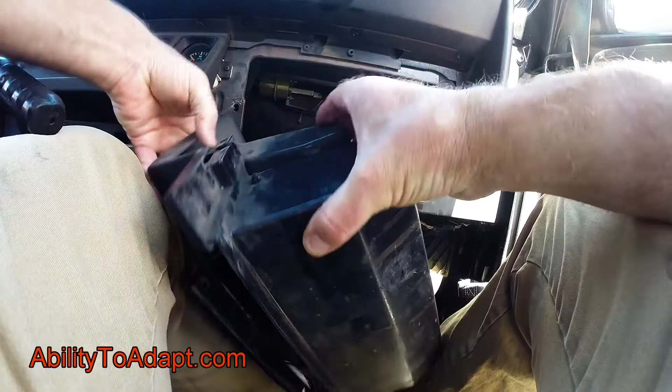So this just comes out. It was a pain in the butt to get out, because there's 3 screws that hold it up here under the dash, and then several screws underneath here. On the back side of this, there's actually 2 screws on either side—you can see here and here, and also on the other end, and they screw through these holes. The only way you can get to that is you have to reach up under here to get a driver to pull them out, and there's not much room. You can get maybe 2 or 3 clicks on your little ratchet.

You can't even get your hand up in there to turn a screwdriver or anything. So to do the other side, what I actually did is I pulled this faceplate off, took it off - there's 3 screws up here, 3 across the bottom - and I pulled this little thing off, then pulled my radio out, and was able to get my hand in from where the radio is around to the 2 screws that went through the backside there.

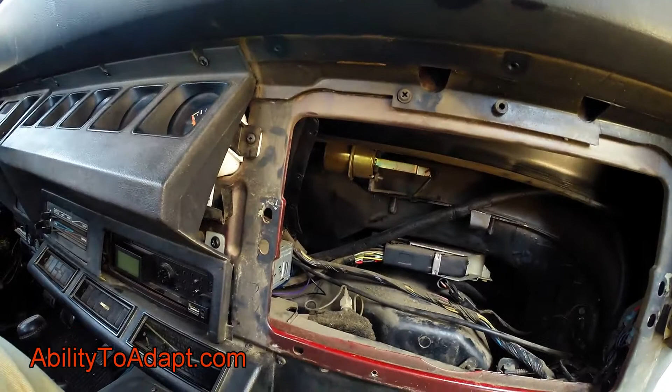So anybody who's got the Jeep Wrangler in this style, which is from like 88 to 95 or something, it's called the YJ Jeep Wrangler, that's how you can get that glove box out.

And I'm going to build one out of metal and show you how I'm going to do it. So let's head out back and have a little fun.

Okay, so we're back in the wrecking yard, and if you wonder what that noise is, that high chirp sound, that's cicadas. They come out in the summer when it's very hot here in Tucson. It's like 104, 106 in the shade right now. So anyway, it's pretty toasty.

I'm going to show you more about my glove box build and what I'm doing with that, and maybe this will help out anybody else who has a YJ Jeep Wrangler that needs to or wants to make a glove box. I'll talk more about the reasons why I'm doing that as we go along in this video. So let's cut to a different view.

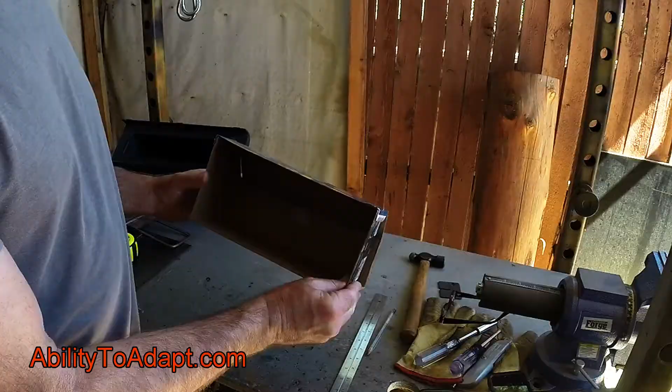Here you can see the little template I made out of cardboard. I had it all taped up, but I actually cut it because I'm making all my little parts. So looking at it, here's the opening for my glove box. Now when you look at it, you might think it doesn't look too big, but when you compare it to the original, it's probably got twice the volume.

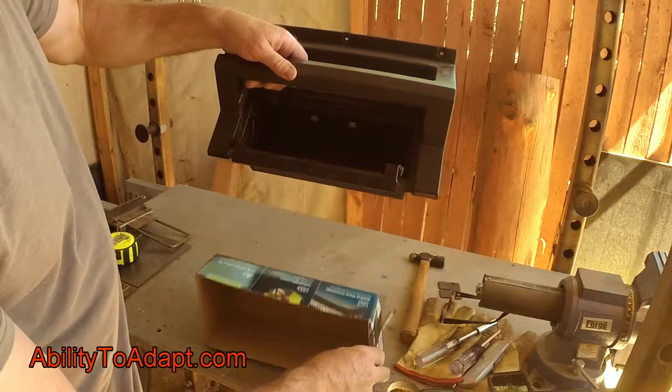Now I don't know if I'm going to put a grab bar on mine or not. I'll wait and see when I have it fabbed up most of the way and get it inside my Jeep, see how it looks, and then I'll determine whether I want to put a grab bar on it or not.

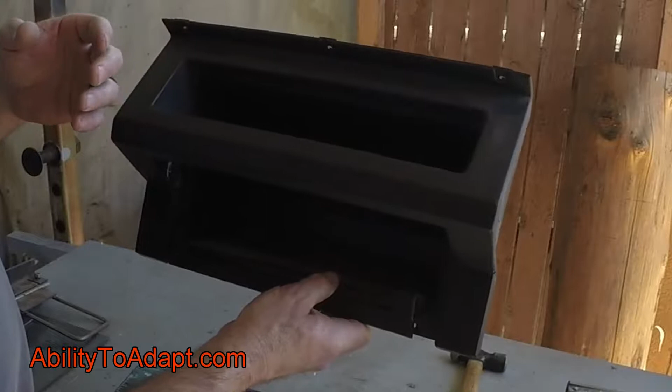And then I'm eliminating this top little section here because this never locks. You can slide stuff in there, but it'd have a tendency to bounce out if you're on a rough road, and then people would steal stuff out of there - they'd take my pencils and stuff, or my baling wire.

So let's take a look at some of the parts. Okay, so here you can see all the parts I have cut out right now to actually make the box itself. I'll have to make a faceplate for it, and also a door. I'll have to hinge it and then source a little lock or make my own lock.

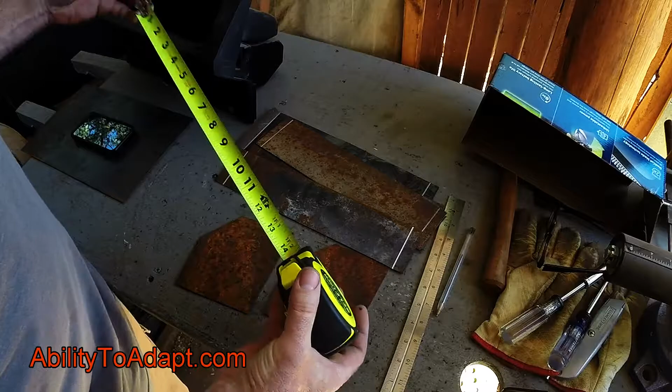And I'll give you the dimensions of this too, how I did this. Now this box, when we look at it, the interior dimension is just shy of - well, it's about 10 3/4 inches in width. So that's about how long I'm making this myself, about 10 3/4 inches long.

So you can kind of determine that, as you know, if you want to fab up a piece of cardboard, what I would do is cut out all your pieces out of cardboard, tape them together, and then see how they fit inside your glove box and make sure there's going to be clearance for it, because there might be something in your Jeep that's a little bit different than mine, because mine's a 95 Jeep Wrangler.

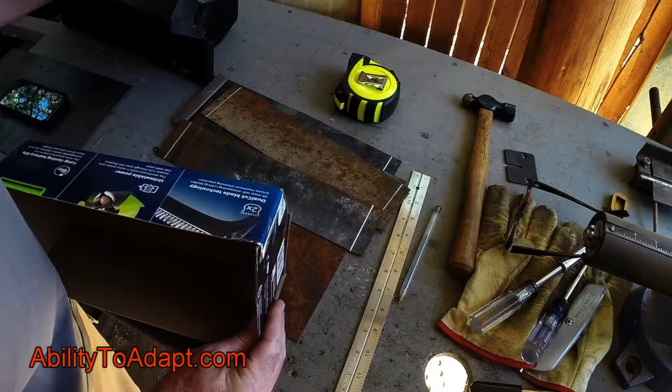If you use the dimensions that I give you, I would fab up with cardboard first to see if it fits, and then if it doesn't, make an adjustment here and there, which is what I had to do when I was doing this, because originally I had this a little bit taller, but it kept hitting part of the firewall back there, a little brace, so I had to cut this a little shorter, and then I determined that it fit.

Now, in looking at this, you're probably realizing that this is cut at an odd angle, and this is actually my opening, so you might wonder why I have this angle cut like this. If I was to put a square on here, you can see that there's a gap. Why not just make this square?

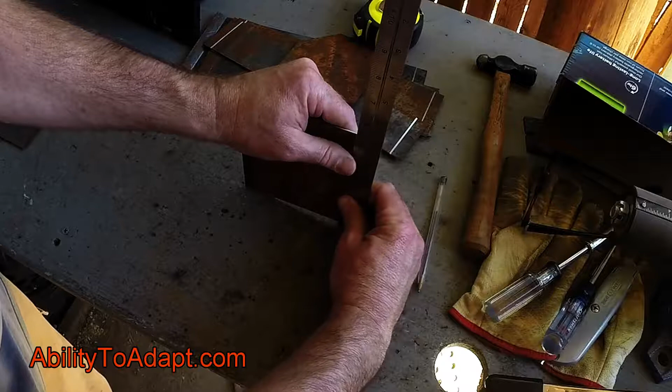Well, my reasoning is because this is the face that you're looking at when you reach into your glove box. I cut this at an angle so that in order to make it flush, I'll have to tip it back a little bit, which creates a downward slope into the glove box. So when you put stuff in there and open the door, it's less likely to slide out, and it doesn't really lose much space by doing it this way. I figured that might be a nice little thing to do with my glove box.

Now in cutting these, I cut them on a bandsaw that I have, which I'm going to show you. I did run into a couple of issues with this depending on the width of my long pieces I need to cut. You're probably wondering what these little cuts are — well, this is the dimension I'm looking for.

The width is about almost 11 1/4 where I cut these through, and you can kind of see them. This is actually where I'm going to bend these. So what I did is I took a scrap piece and cut a groove in it with my bandsaw, and then bent it, and you can see it makes a really nice bend.

I don't have a shear to cut this stuff. If you had a small shear or a shop you could go to, you could cut this stuff up really quick, scribe it all out, cut it, put it in a bender, be done with it. But I doubt even in a bender you're going to get as nice a bend as I did here by cutting this groove about halfway through or slightly more. I'll show you how I did that on my bandsaw.

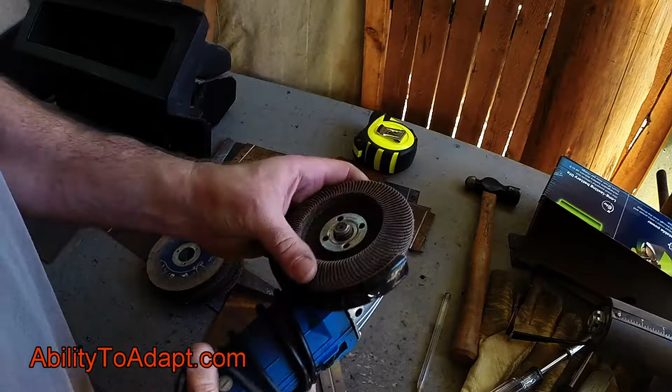And you could also do this if you don't have a bandsaw — you can use an angle grinder with a flap wheel on it. I bought this one at Harbor Freight probably 10-12 years ago for like 10 bucks, I think they're probably $14 or $20 now. It's got a flap disc on it. But if you're going to cut something like this, don't use one of these grinding wheels.

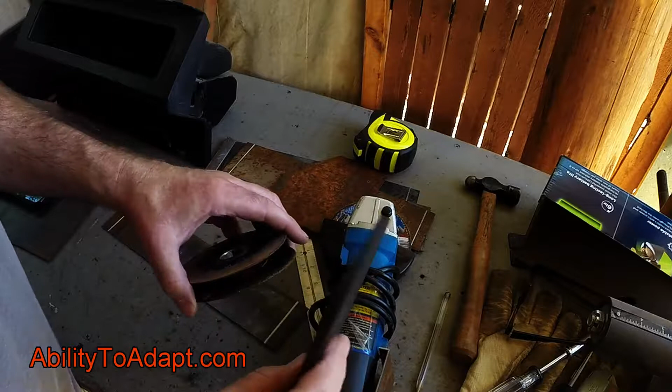I see a lot of people use something like this to cut plate, and it's just ridiculous because you're removing so much material. It gets a lot hotter and wastes a lot of material. So rather than a grinding wheel, get yourself a cutoff disc. This one's maybe an 1/8 inch thick, and this one's maybe a 1/16, 1.6 millimeters. These work really good for cutting something like this — you waste a lot less material and it'll cut through way quicker.

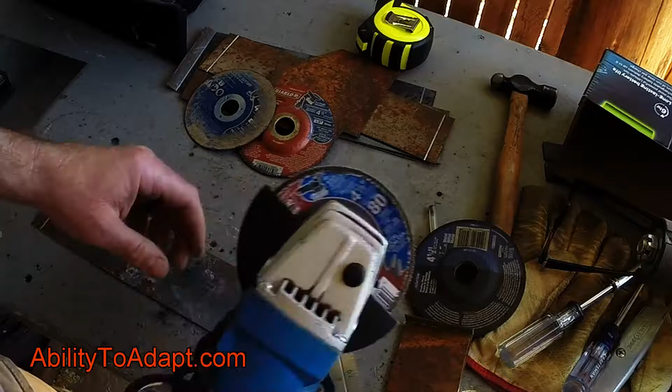And don't try to cut it in one shot — make one pass and then make another pass. The way to do that is you want to set this thing up and clamp it, then use your other hand to guide yourself. Pay attention to what you're doing. Anyway, that's a way you can cut this even on the cheap if you don't have access to a shear or a bandsaw like I have.

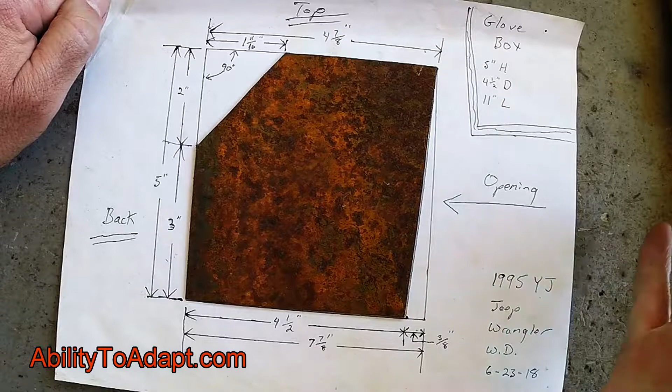Okay, so now we're going to look at the dimensions of this. Remember, this is for a 1995 YJ Jeep Wrangler, so any YJ these dimensions should work. But as I said, I'd make one out of cardboard first — just lay it out, cut it, tape it all up. Make your top, your sloping part, the back, the bottom, and two ends. Tape the thing all together and see how it fits.

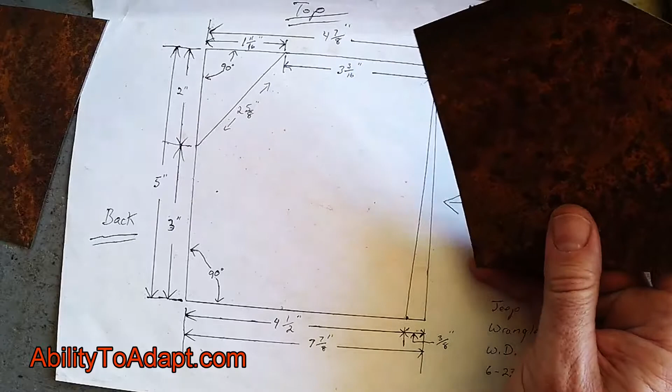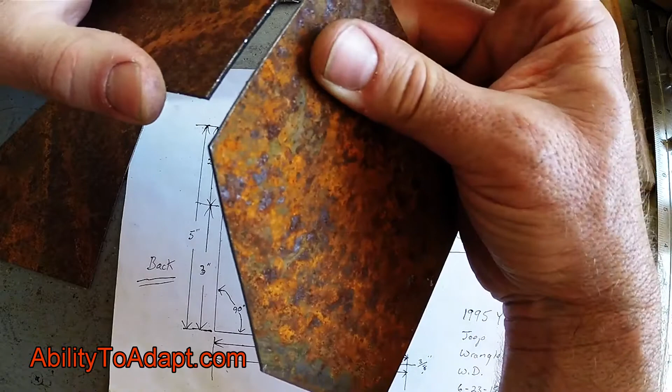Some might be wondering, why did I want to put a bend in here? If you have a bender you can bend this stuff, but the issue is it's going to be hard to get your dimensions where you want unless you're used to bending material and calculating that. And others might think, why don't you just weld this and butt it on here, goes on the back — why don't you just butt these pieces together and weld them, or lay a little square piece in there and tack it, which I could do.

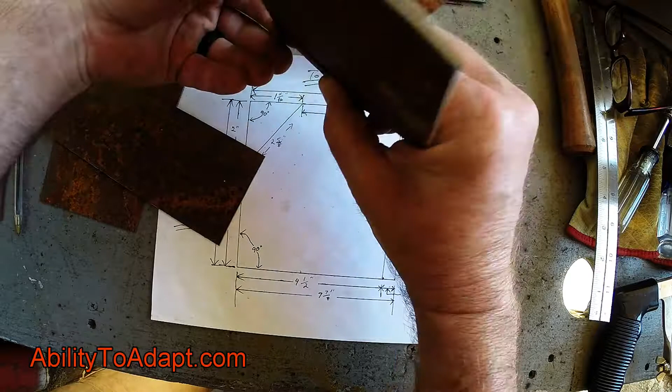This way I can actually put a piece on here, and as you can see, I can tack this a little bit on the back side, and then reinforce it by doing little tack welds on the inside too, so this will be really strong.

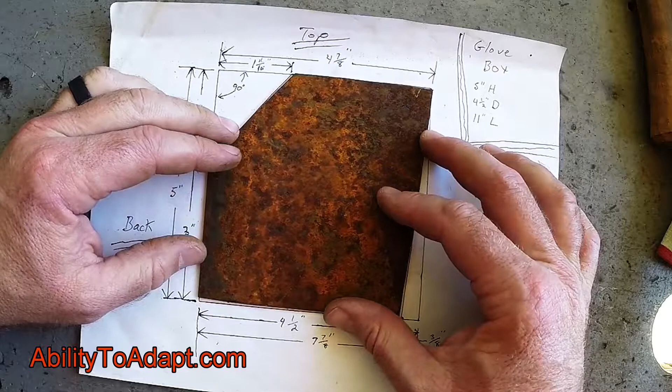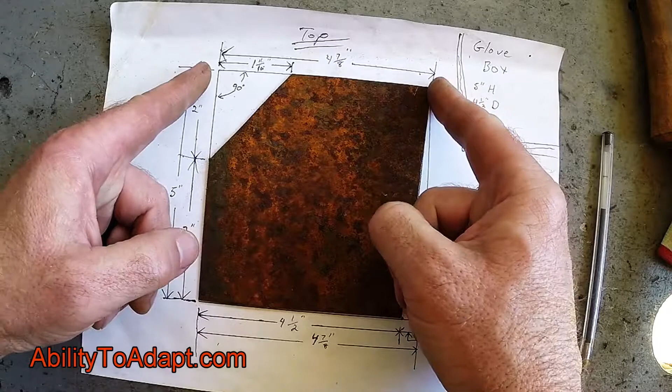Now with this, a couple important things to remember: this is basically 5 inches by 5 inches square approximately. The final dimensions I came up with are 4 7/8, because I had to cut a little bit off since I tipped it as I was showing you. So those are the dimensions: 4 7/8, 4 7/8, 5 inches high.

So basically this is how I laid it out. This is a 90 degree here, 90 degrees, 90 degrees, 90 degrees. You just got yourself a square piece of metal is what you're starting off with.

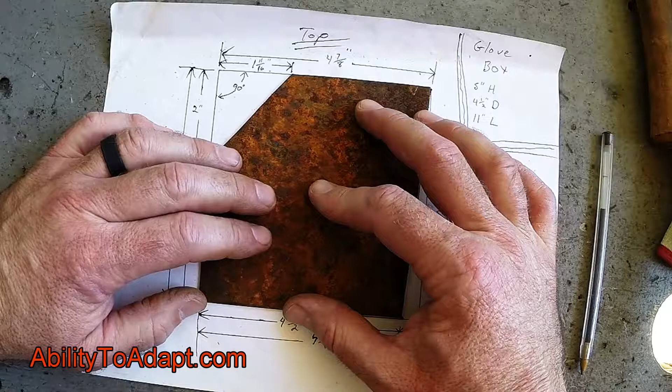From this, I don't know, you could figure out the angles and everything, but when I was just fabbing this up and making it out of cardboard, I didn't know what angles I needed, so I just cut it and figured out a way to make it fit. Then I took the end piece off my cardboard, measured the dimensions, and just rounded them down slightly to get this to fit the way I want it to.

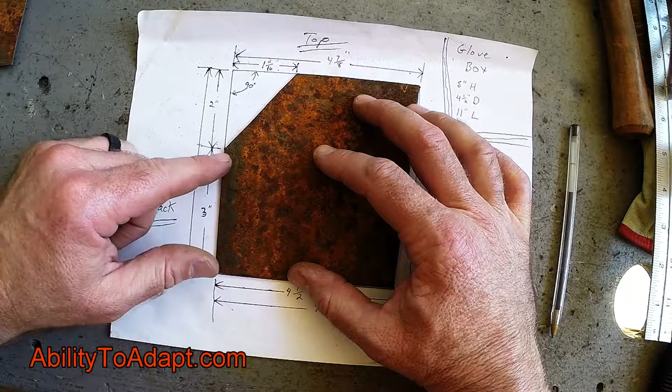So you've got 3 inches to here, and then you've got 1 1/16 inches from this corner to this point.

So if you figure those two dimensions out, and 2 inches here, you could scribe a line across there, and that'll cut that off. That'll fit perfectly. And then the same with this: this is 4.5, and then a 3/8 little stub here going to a 0 point up here, and then just cut that piece off, and this is what you're going to end up with.

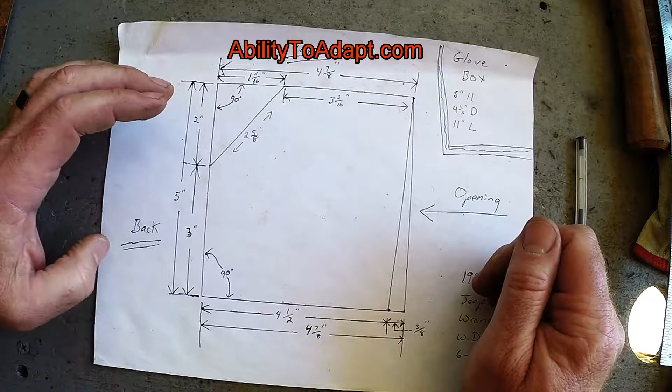So these are all the dimensions, and I'll try to put this on my website, take a picture of it, so it'll make it a little easier. But the box is actually 5 inches high, 4.5 inches deep, about 11 inches long. You might be able to get 11.25, or not, I don't know. You just have to check with your own vehicle.

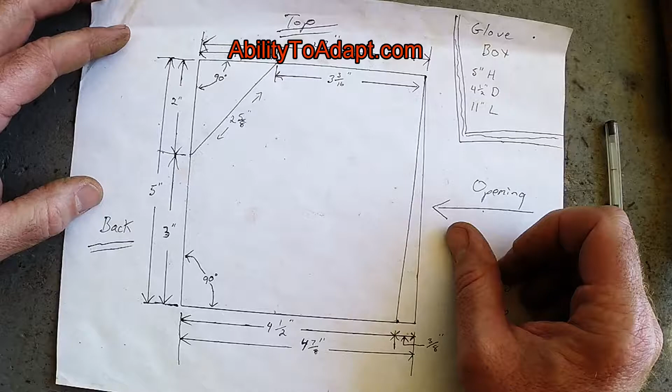So those are the dimensions there, and based on this, it'll be pretty easy to lay this out and cut it out. Remember, you need 2 of these. And then the dimensions for the top, this back sloping part, the back and the bottom, well, it's just based off of this. Once you cut these out, I would actually measure these and then cut out your pieces accordingly.

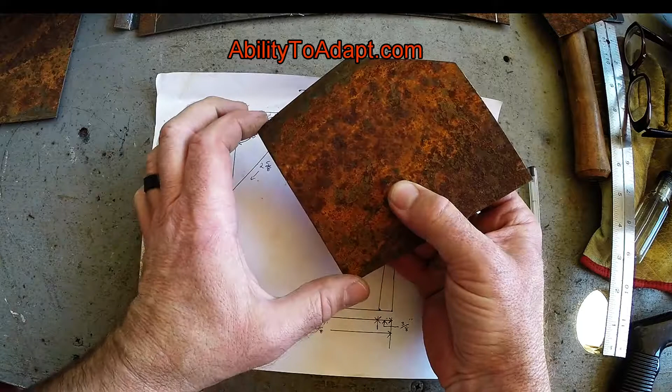And if your cuts and everything are accurate, well, this will be 3 inches wide, so you need 1 piece there, 1 piece here, 1 piece here, 1 piece there, so 4 pieces. And that'll get you the box part of your glove box.

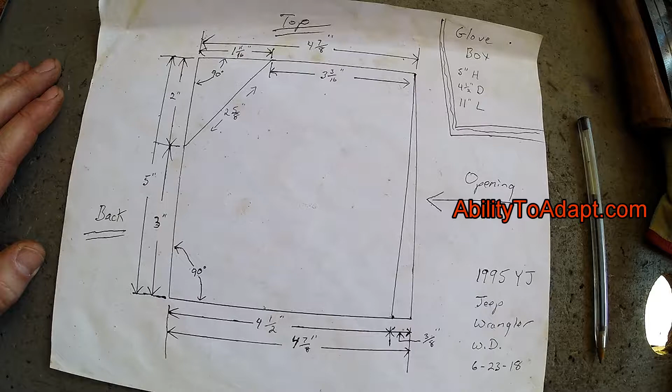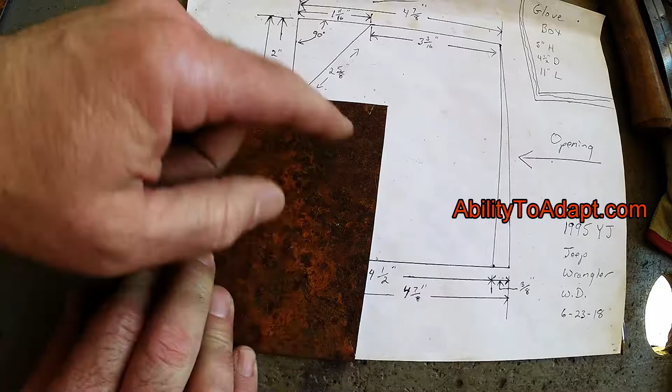Just in case the picture didn't come out very well, or what I just videoed didn't come out well, I'll take another little video of this, and you could always pause this video and write the dimensions down. Basically, when you're cutting this thing out, all you're doing is shifting it down into a corner like this. So when you lay it out on your piece of metal, that's what you'll want to do: lay it out in a corner, come across, come straight down, put your dimensions on here, and you'll get what you need.

Okay, this is just a Harbor Freight 4-inch by 6-inch bandsaw. When I originally bought it, it was like $200 with a coupon. I've had it for a year and a half now, and some people might think, well, $200, you could have bought a glove box, because a new one made out of metal is like $200.

But the issue is then I'm not learning anything, and I'm not trying to develop new skills and test the skills that I have. So if you're always buying things that you could learn how to make yourself, you're really kind of shortchanging yourself, so to speak. I've made so many different things with this, and it's helped me in so many different ways. It's actually saved me money with tools as with skills. You're always better off buying the tool, learning how to use it, paying for the skill if you have to learn how to do it properly, because in the long run you're going to be far more ahead than someone who's always having somebody else do something for them.

If you want to develop the ability to improvise, adapt, and overcome whatever challenges you're facing, that's the mindset you have to get into. Sometimes it's just better to pay a professional, but as a mechanic used to tell me, the only difference between a professional and an amateur is a professional knows how to fix his mistakes.

Everybody makes mistakes. So the issue is cutting on this bandsaw. As I'm cutting through here, at some point, because of the width, it hits. This is called the depth of the throat, and this is the width. So this plate hits. What I had to do is turn it around and cut through on the other side, but this was a bigger piece, so that hit too. I had a section here I could not cut on my bandsaw.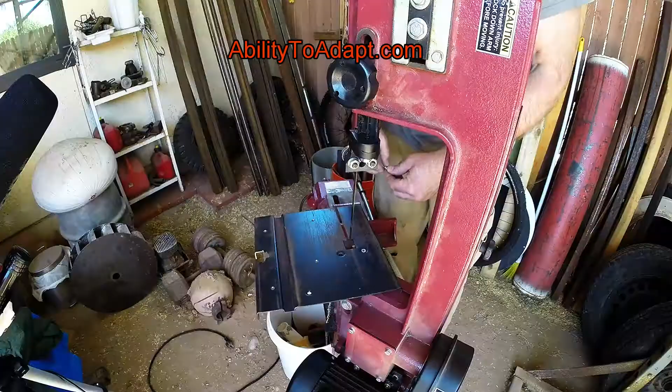In case anybody's watching this, I only put one screw in here. I didn't put both because I'm not actually cutting anything, so I'm going to remove this screw. Then you have this little plate that goes on here to cut in the horizontal position. That plate is more or less just a guard to keep anything from getting jammed between these two wheels.

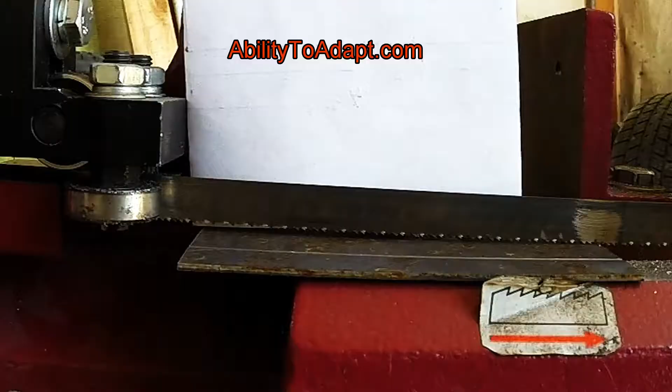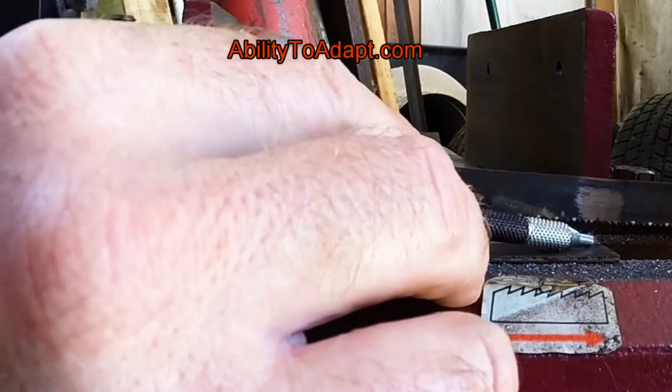One of the issues if you're going to cut these little grooves in your plate - I just use my bandsaw and cut them like this. But the problem is, if you look, the blade is hitting here but not hitting here. This gap is actually bigger than the thickness of the metal. So if I try to cut this groove like this, it's going to cut all the way through on this side. What you need to do is raise the other side up like this.

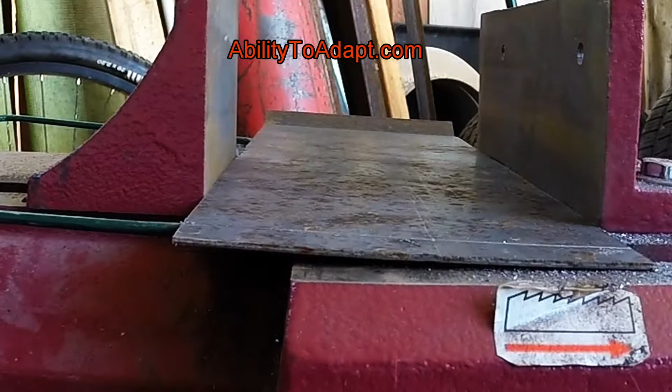So how I accomplished that - I just took a piece of metal rod laying around, dropped it in here, and when I tighten that up and bring this down, now you can see these teeth are touching pretty much all the way across.

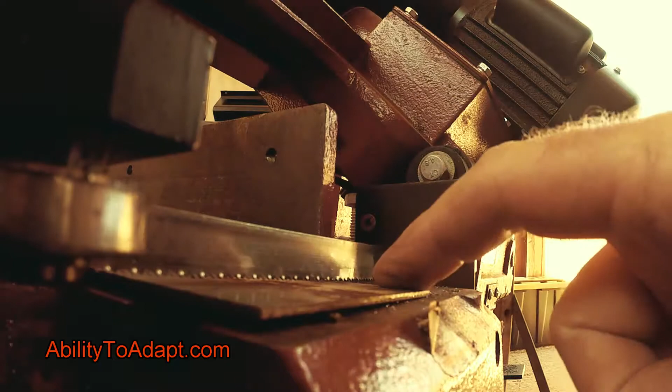Come back down, and that's a little better. It's probably about the same, except now it's hitting here before over here. So I want to try to adjust that a little bit.

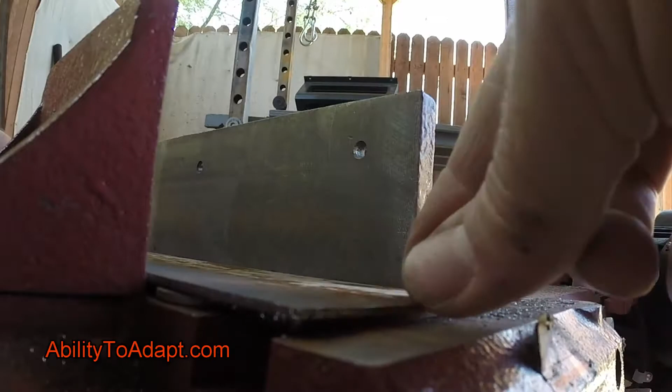Okay, so I got a couple washers. I'll set them over on this side because I want this to slope that way. You want to remember, when making these grooves according to where your line is, I want to make sure the edge of my teeth, the kerf, is on that side of the line, because I want that dimension between the lines left over. I want to adjust my blade so it's on the outside of that line.

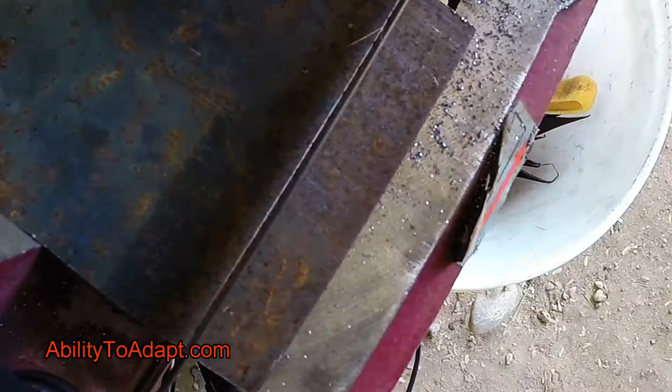So I'll play around with this a little bit - I'm not looking at the top edge of the blade, I'm looking at the little teeth. The kerf makes it wider than this part so the blade doesn't bind, just like a wood saw - metal saws are the same. I'll adjust that about where I want it, tighten my clamp down, and let's give this a shot. I got it locked in there good right now, so let's fire this thing up.

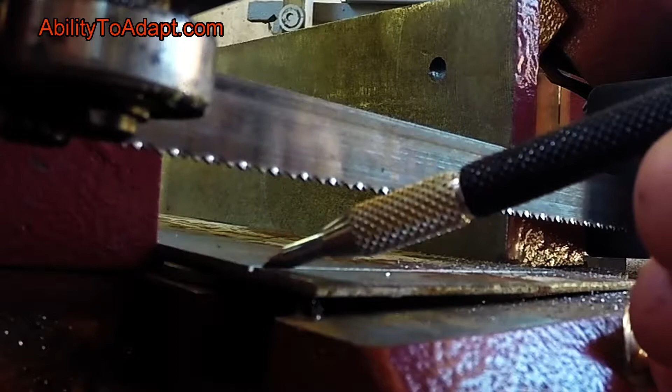So there you can see I'm probably about halfway through that, and then you want to check the other side, just in case this is hitting one side a little more than the other. And that's pretty good.

Okay, one thing we want to make sure that we do also is we want to clip these corners off at like a 45-degree angle or thereabouts. I'll show you why I want to do that.

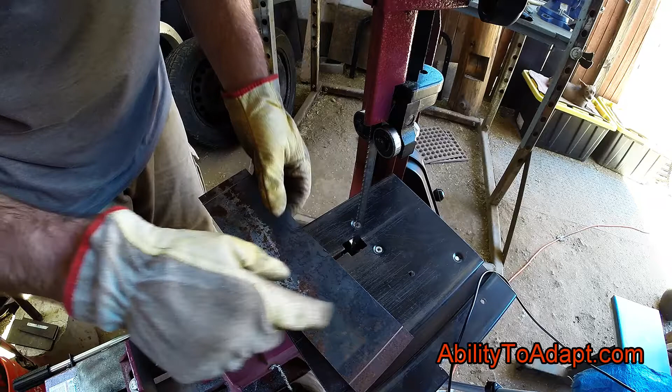Actually, as I look at this, I think it's better to bend this first, because this little part here, if this is cut off at that angle across here, it's going to be really difficult to get this little section over here to bend properly. So I'm going to have to bend it first, then cut them.

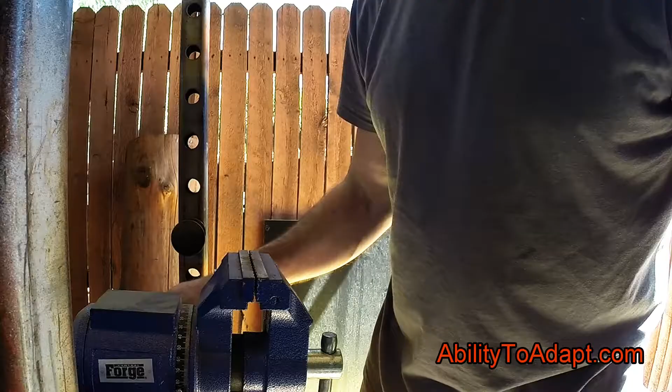Okay, we're going to do a little bit of bending, see how this works. This is a little bender I made for something else, where I'm building myself an air rowing machine from scrap metal, and I'm recording all that, and when that's done I'll be putting that online, but I'll probably put that in my paid video area. So this is my little bender I used for making my fan blades, and I'm going to use it for this and see how it goes.

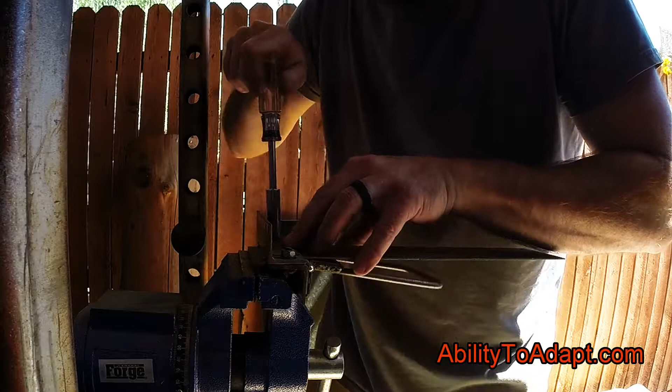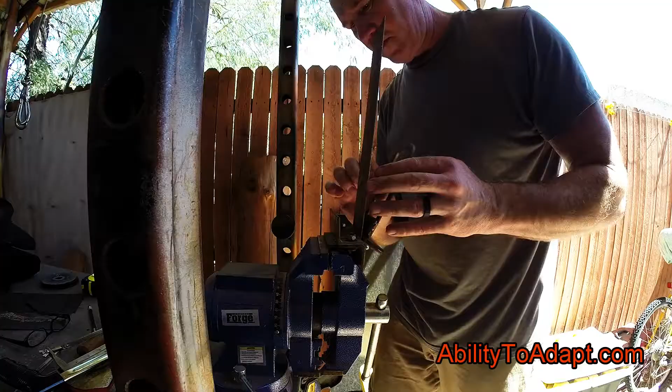Not quite a 90, so I'll back it out just a little bit. That's about all she'll do. This is thicker material than I made my fan blades out of, but I could finish this off in my vise. What I'll do is I'll leave this up a little bit.

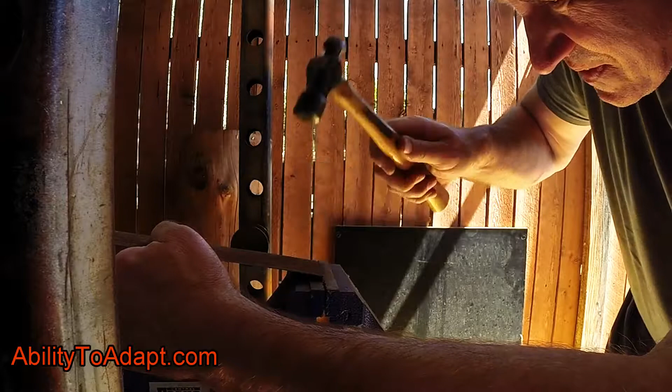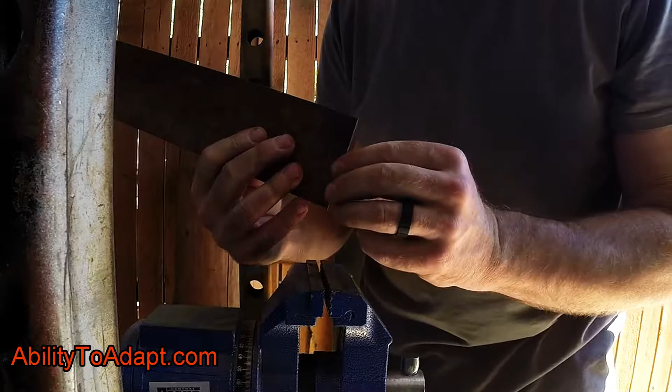Beautiful. So I'm going to bend the rest of them, no reason for me to show you all that. One of the issues is when I get to this wider piece, it won't fit in here because I made this for smaller things and I haven't made a bigger bender yet. So with this one, I'll just clamp it in my vise, and I'd already started bending it.

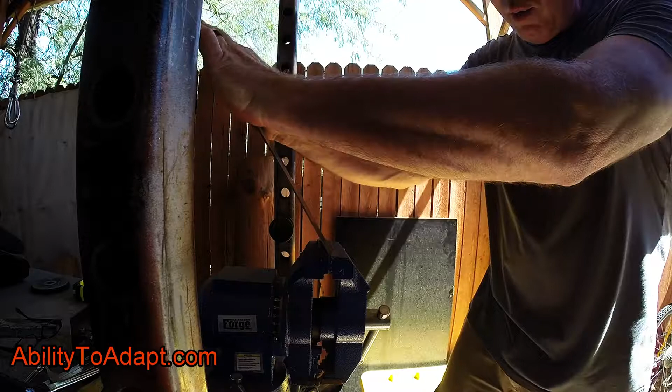The biggest issue when you're bending it is you don't want to push up here where you've got more leverage, because this will all bow. You can take that bow out of it after you're done if you want. You want to try to keep the pressure down here lower, so that's less apt to create a bow. Then once you get it down a little ways, put some pressure on it. This one's perfect. There you go.

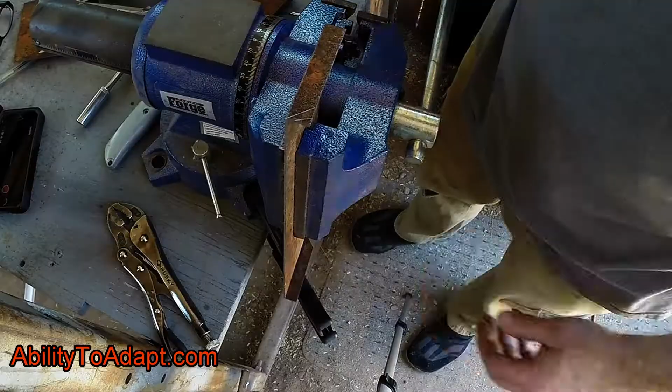Okay, so you're probably wondering why I am notching this. Just to show you when I put this thing together: remember this isn't cut at a 90-degree angle, it's got a slight angle to it. So when I match this up on this corner over here, this is going to stick out a little bit, so of course I want to notch this side. But then also when I put this other piece on here, I have two more pieces. When this goes on here, see how it's going to overlap right here, and I don't want that gap. So I'm going to just notch this all out so this will fit together really nice.

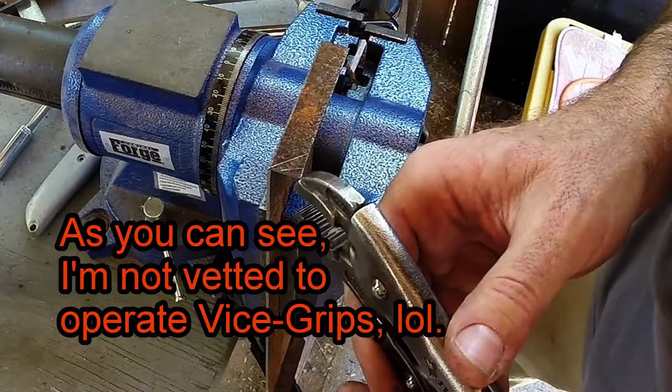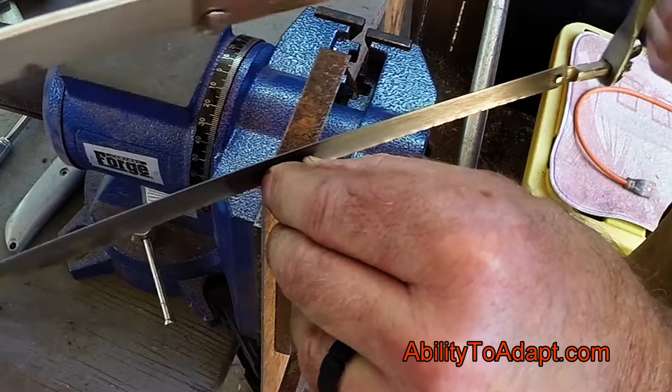I actually couldn't cut them on my saw because of the angles and everything, so I've got this cheap, like $40 Harbor Freight with a coupon vise, and it rotates, works really good for things like this. You could use a little cutoff blade on this if you want, but I hate noise any more than I have to, so I'm just going to clamp a pair of vice grips on there and cut this carefully. I don't even have to cut all the way through this, just get a good little start going there and kind of flex it. If this unbends too much, you can hammer that back, but I'll just cut it a little more.

Then I'll try flexing a little bit there. See, now it's actually flexing in my groove, and it's not flexing the rest of this. So before I assemble this whole thing, I'll actually hammer it all flat, make sure it's all nice and square.

There you go. Okay, so here you can see I've roughly assembled my box with a couple pair of vice grips, and if you look at this area right here, you can see that I already cut the little corners off these long pieces. I need to file them down a little bit more. If you look here, you can see the gap between here, all across here.

Part of that is because this is bowed a little bit. When I do my final assembly on this, I want this to be closer like this, because it'll make it easier for me to run a nice little weld bead down along this little groove. So I don't want it open like that. And as you can tell, looking at it here, it's hitting these two pieces.

So all I need to do is file this area a little bit with a file, and then this will pinch together a little bit better and help this form a little bit better. I could probably get away with it like this and just pinch it together as I weld it and tack it here and there, but I'm going to file it a little bit for a nicer look, even though you won't see it because it's inside the Jeep.

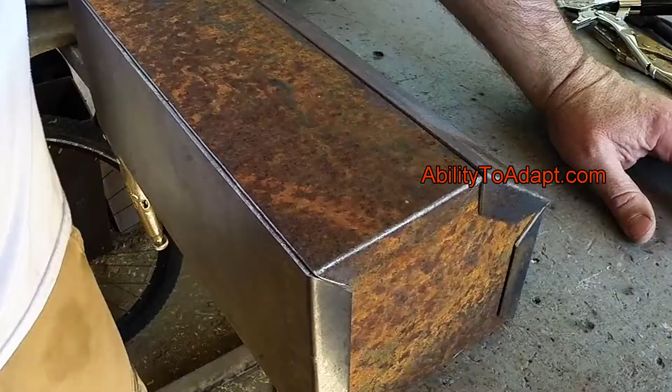Okay, so I did file these down a little bit. You can see they fit a little better, particularly this one. This one isn't as big a deal, but it was still hitting here, which pushed this open and created a bigger gap. So you can see my gaps along here look a lot better.

The other thing is, if you don't have a welder but you've got a drill and a good pop rivet gun, you could just drill a couple holes in here and pop rivet this whole thing together. So there is a way to work around this if you don't have a welder.

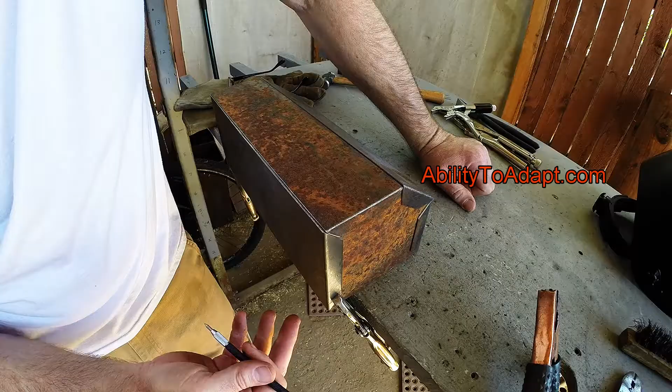So it's just thinking ahead and determining what you're going to do. And that's the same with anything you're working on in life. It might throw you little curveballs, and that's where I like to think about how the skills you learn in one thing can be applied to what you're dealing with. It's not always a life and death matter—a lot of times it's just simpler things that, if you can figure them out, make your life easier. Or maybe it saves you a lot of money. Or even if it doesn't save you money, it helps you develop a skill and test it, and develop it even better.

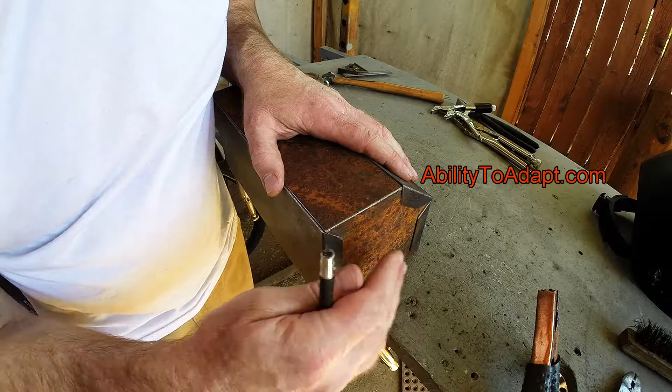As you can tell, you want to pay attention to details, because details determine your success to a large degree with what's going to happen. If you just haphazardly slap something together, it's not going to look nice, like this. If I had high quality tools, a shop, a shear, and some type of CAD program, it'd be a lot easier to do this, but I'm just doing this the old school way. So I'm going to weld this up—let's get to that.

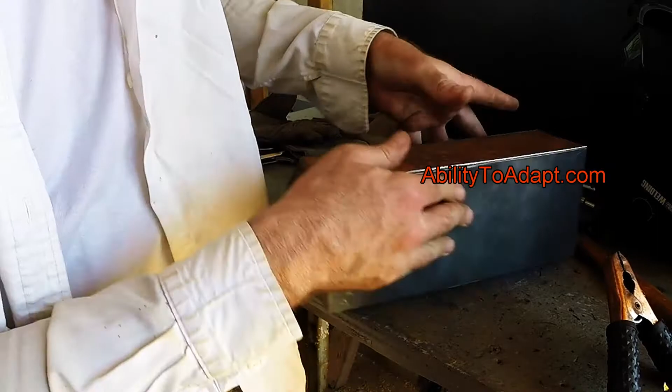So here you can get a good look at the ends. I just tacked it around here, did the same on this other end, tacked it all up. I think it's going to be pretty solid.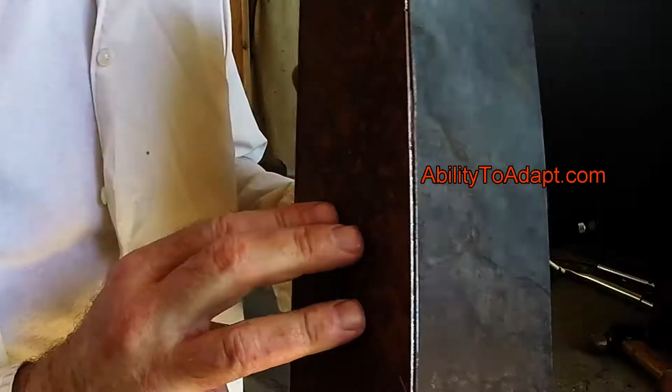And if you look at my gaps, they actually look pretty good. Hopefully you can see that, how nice and even they are. And that just comes from paying attention to detail in what you're doing.

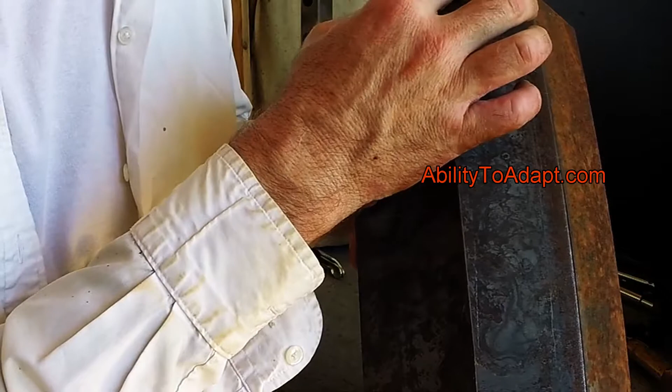A person wouldn't even need to weld these if you're just going to pop rivet them, and if your work is pretty high quality with nice seams like this, you could actually put some caulking on here, or some foil tape or something, to seal it up better if you wanted to—or you could just leave it like this. It's not going to really hurt anything.

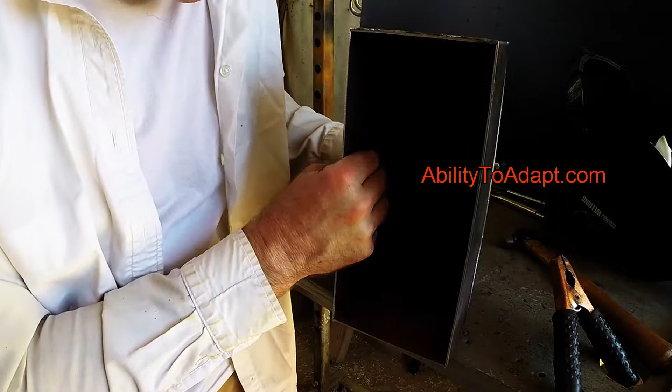So I'm debating—I might just run a couple little tacks on the outside of this just to maintain its integrity a little bit better, and maybe put some foil tape or something on here to seal it up more, and then I'll go ahead and paint this all. I'm actually going to use a paint that will react with the rust, and I'll tell you about that in a little bit.

So I'm going to tack that up, and that'll be finished with this for right now. I need to do this box first in order to do the faceplate and the rest of the part that I need to do in my Jeep. So let me get this done, and we'll get back to you.

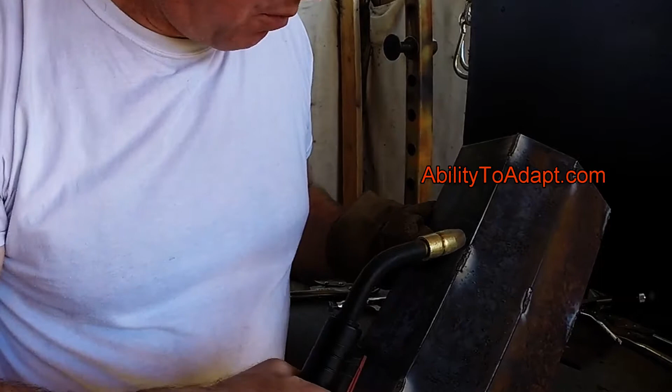You can begin to look at this a little more closely and see I'm just running some tacks along here. Some are a little bit better than others—this one's actually pretty nice. Part of the reason is I was pulling these, whereas this one I actually pushed the weld gun. Pulling as you're going like this, the heat builds up on this tip.

As you're pulling, it keeps feeding the wire into this, and it's going to get really hot. With this thin material, 16 gauge, you've got to go fairly quick. It's actually better to push weld on this, welding like this, because then it's pushing the heat away instead of preheating it. With thin stuff you get a better weld and you're less apt to get blow through on your metal, which creates little holes. That's just a little trick for those who are learning how to weld.

I've never been certified as a welder, I'm just learning this stuff on my own. So there you go. I believe I might just finish welding this up and be done with it instead of using some type of tape, and then this thing will be really solid, and then we can go back out into the Jeep and I'll show you how I'm going to configure the rest of my glove box.

So whatever you're dealing with, just use the tools you have. Always invest in knowledge and in tools, because it's going to help you rather than just having somebody else figure things out for you all the time or do it for you. And it's the same with nutrition and training and health and all that stuff.

Research some things, but don't become paralyzed through analyzing things. Get to a point like, okay, I know this is right, this is a good basic way to train, or this is a good basic way to eat. All the other stuff, here and there, people get all kinds of arguments about, and a lot of times it doesn't mean hill beans. If you're eating half decent and training with a half decent program, putting in the effort, and then paying attention to the details that apply to you and what you're trying to accomplish, you're going to get it done. Okay, let's go.

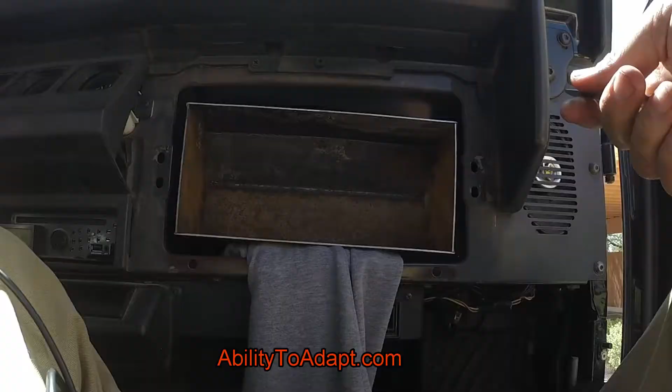Okay, so I've got my box made, and the next thing I want to do is put a flange around here. I actually want to weld a little thin strip of metal that sticks up, kind of like this, all the way around my box, so that when I insert it in here, my other frame that covers this up will actually overlap it a little bit.

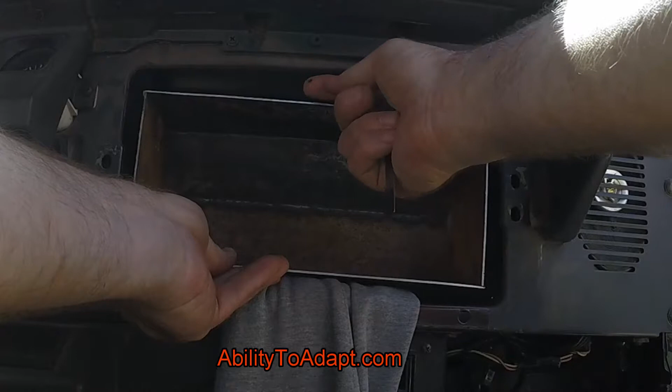The next thing I need to determine is how much room I have on either side of this, and top to bottom, to weld a little plate all the way around that fills this gap in somewhat. But the other thought is when I put my door on here, I want to hinge my door off of this, but I also don't want my door to just hit on this edge — I want my door to overlap this a little bit. Things will make more sense as I continue in this build.

So I can butt this all the way across and then measure the distance here. It's a little less than 7/8. Then I can divide that in half and take a little bit off of that, so this fits in here nice.

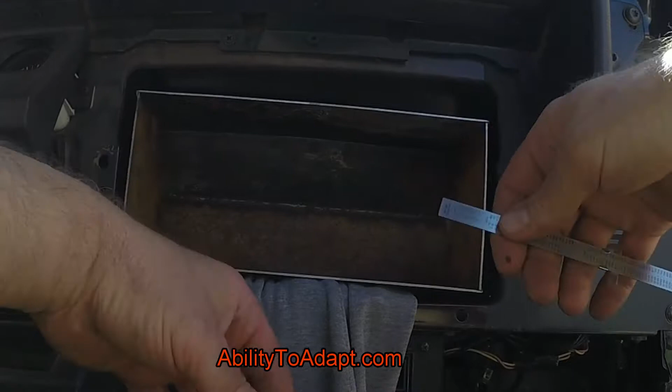That's what I'm going to calculate right now, and then I'll cut these little metal strips out and weld them to this, creating a little lip that goes all the way around the perimeter of this box. I'm going to do my dimensions, measure it, and provide the dimensions I use. Though for your Jeep the opening might be a little off, so I'm going to try to create a bit of fudge room — make it a little smaller so it still might work for yours.

As I said before, it's smart to fab something up out of cardboard first and make sure it's all going to fit, then always test fit your parts. You could tack weld a little bit, test fit it, and if it looks good, then weld it up the rest of the way. I'm going to get on that, and once I get my dimensions figured out, I'll meet you in the backyard.

Well, I don't think we actually made it out to the backyard. I did.

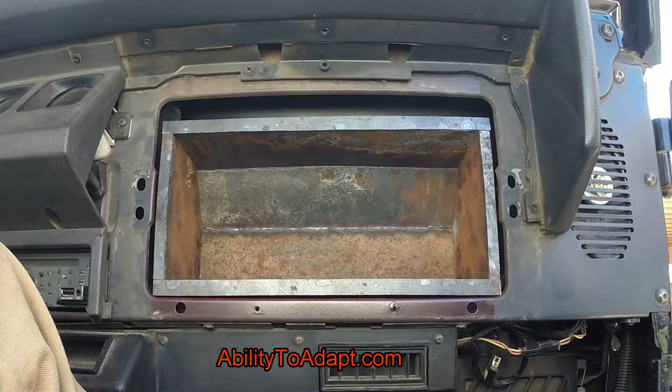I went back to my wrecking yard and fabbed up some more on my box. As you can see, I've got these little side pieces welded on here now, and I told you I'd give you the dimensions of these. These are 3/8 of an inch wide on the sides, and the top and bottom are a 1/2 inch wide. What I did is I just took them and on this edge, I welded it on the back side.

So if you look at this, you can see the piece that I welded onto the back. I'm going to round this all off, file it nice so there's no sharp edges or anything like that. You can see how close it is, the dimensions with 3/8. I've got maybe an 1/8 of an inch on this side and a 1/16 on this if I adjust them a little bit.

But now maybe this will start to make a little more sense, because this is going to be my faceplate, and I'll cut this out square. What I want to do is cut this so it overlaps this flat edge that I welded on here. It'll overlap it only about halfway inwards, and then when I put my door on here, I want it to overlap the other half of this flat piece all the way around, part way out.

That way when the door closes, it's got something to set against more than just the little edge of this metal. So then it's got a flat surface to set against, and the faceplate will come down here and butt up against this, so it'll give me a nice transition. That's kind of why I'm designing it this way.

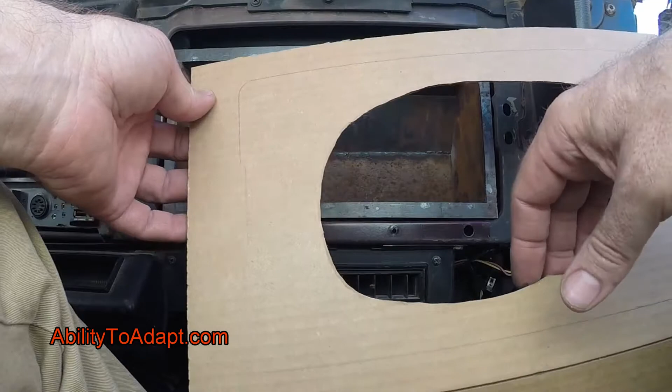But now I kind of need to figure out how to center this thing, and I might make a temporary little L bracket and drill a couple holes in it, and a couple here, and then mount it on both sides. Then I can screw this to it, and that'll give me a way to anchor this right exactly where I want it to be.

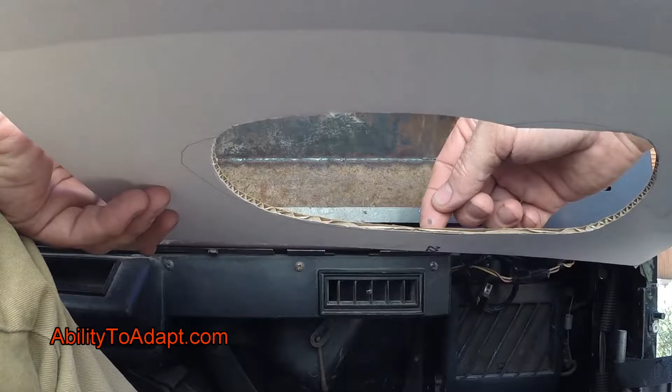Then what I can do is put my faceplate in here and just trace out the interior of that around here. Once I've got that traced on here, I will take a little bit, maybe an 1/8 inch further from that, so that when I cut this out, my little template will run about the middle of this little strap material that I cut and welded on here. That way my door will have something to rest against too. It'll make it a lot stronger, a lot more secure.

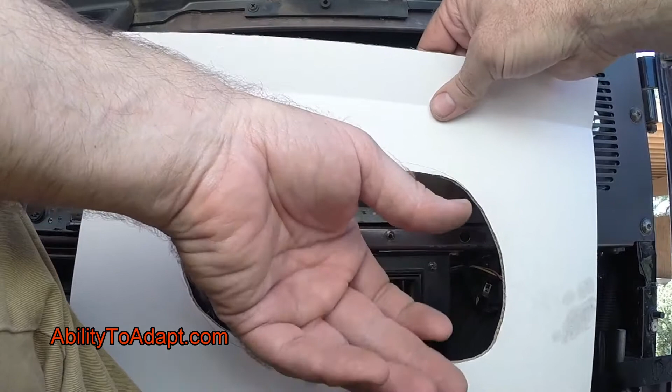So that's kind of the next step that I'm looking at doing. The issue is if I try to lift this up too high, it's hitting a little brace back there as part of the firewall. So you can see the gap at the bottom is less than the gap at the top.

So trying to guesstimate that on my cardboard and everything, I don't think that's going to work as well as just getting this where I want it in here, and then anchoring it, and just splitting the difference in the middle.

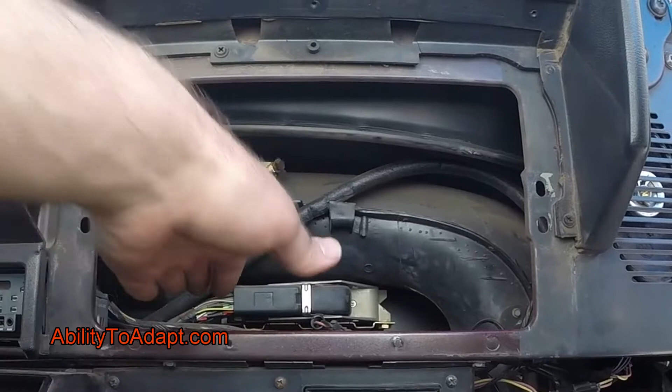The biggest thing is I don't want it resting on anything back here, because there's the AC line and stuff back here. I don't want to break or bend anything, so I don't really want that bouncing off here. Probably my best bet is to stick something in there and get this flush, and I'll do it that way.

So anyway, I'll do that, and I'll take care of that, and then I'll show you where I'm at. I'll probably do this video in 2 parts, because this is a lot of information in one video. It's already going to be a half-hour long, I believe.